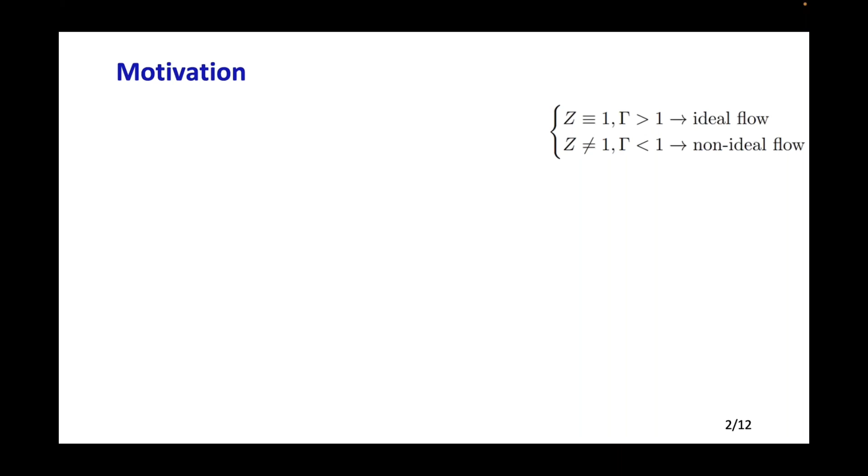So generally, the flow is thought to be ideal if the value of the compressibility factor Z is always equal to 1, or the fundamental derivative of gas dynamics Gamma is larger than 1. Otherwise, the flow is non-ideal.

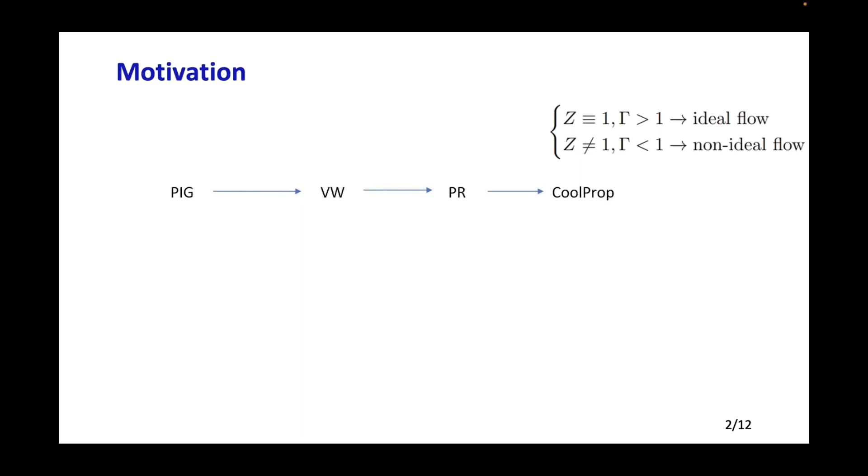In SU2, we already have the polytropic ideal gas model for ideal flow and the van der Waals model and Peng-Robinson model for non-ideal flow. However, if the flow is highly non-ideal, then a more accurate fluid model is required. An example is the fluid model provided by the CoolProp library. So hopefully, with a more accurate fluid model, we should obtain more accurate results.

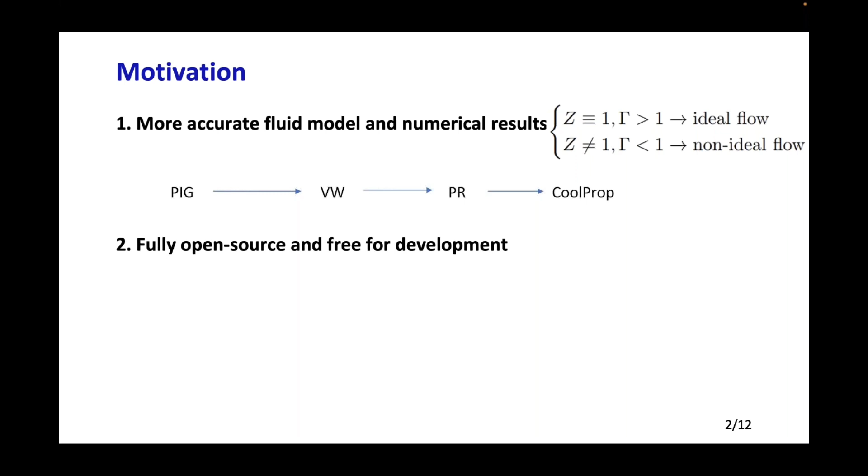So the second motivation is that we hope to obtain a fully open source framework. Although there are some other thermophysics libraries like REFPROP and FluidProp, they are commercial, so their use is limited. Luckily, CoolProp is fully open source, so it's free for development.

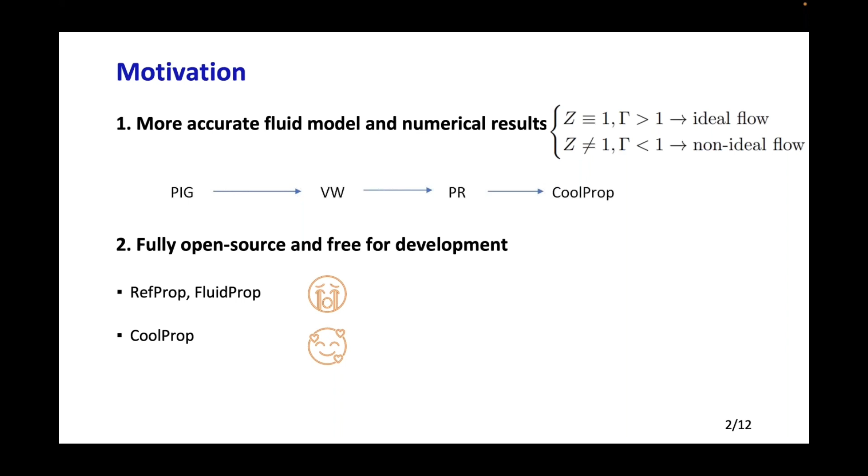Okay, so the goal of this work is to couple SU2 and CoolProp in order to extend SU2's capacity for solving non-ideal flows. Here, I just give a brief introduction of what CoolProp is. Actually, CoolProp is an open source thermophysics library, which is written in C++, but there are some wrappers for Python, MATLAB, Excel, and so on.

And it can provide the state-of-the-art multi-parameter equations of state and high accuracy transport properties, including the viscosity and conductivity. There are more than 100 fluids in this library, including popular fluids like oxygen, nitrogen, or carbon dioxide, so it should satisfy daily use. Also, it implements an efficient tabular interpolation to accelerate the computation or reduce the computational cost.

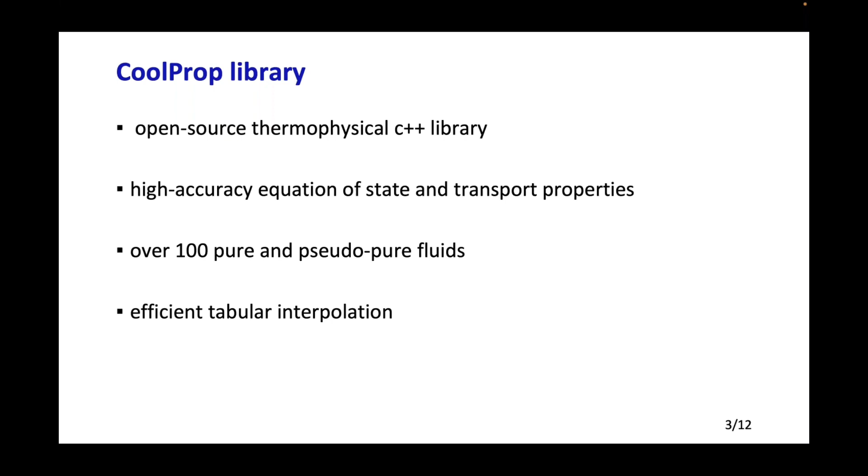Next, I will show the code architecture, but I mainly focus on the interface between SU2 and CoolProp. The interface consists of 3 classes: CoolProp, CoolProp viscosity, and CoolProp conductivity. Here, I just show one of them as an example. So if we see this flowchart,

CoolProp obtains the thermodynamic data like the pressure and temperature from SU2, and then it will call the CoolProp library to update them. After that, the new thermodynamic data, pressure, temperature, density, energy, entropy, even the heat capacity, will be transmitted to SU2 for other computation. And similarly, these two classes update viscosity and conductivity by calling CoolProp.

And this is an example of the config file. So to use this new framework, we just choose the fluid model as CoolProp. And here, we just type the name of the fluid, for example, nitrogen, oxygen, or carbon dioxide, as we want.

After that, CoolProp will provide some useful thermodynamic information, for example, the gas constant, the critical pressure, and temperature, so we don't need to input them manually. And similarly, we just choose the viscosity and conductivity model as CoolProp. So the use of the new framework will be very easy.

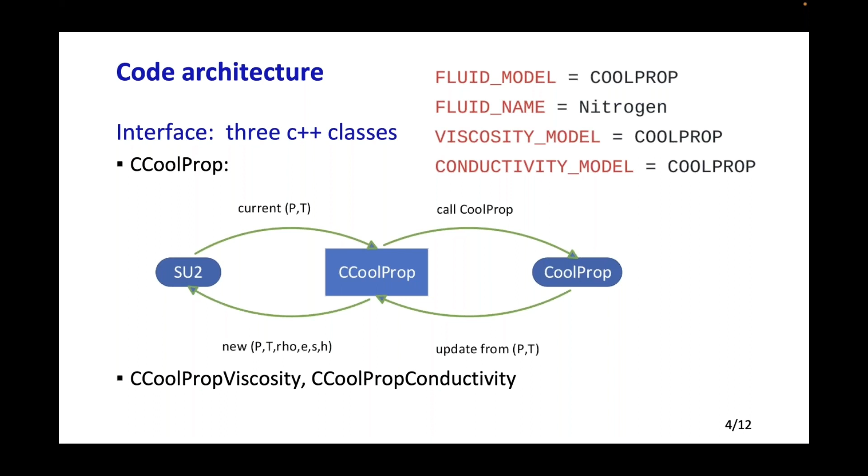Next, to verify this new framework, we consider 3 test cases. The first one is something like the SU2 tutorial, non-ideal compressible flows in a supersonic nozzle. And this is the geometry of the nozzle. Actually, we consider 2 subcases, as you can see in this table. The name of the first case is dilute. Actually, it's the ideal flow of nitrogen.

As you can see, the value of Z is around 1 and Gamma is larger than 1. The name of the second case is dense, which represents the non-ideal flow of MDM. If you see the value of Z, it's around 0.65, which means the flow is moderately non-ideal, because later on we will consider highly non-ideal flow.

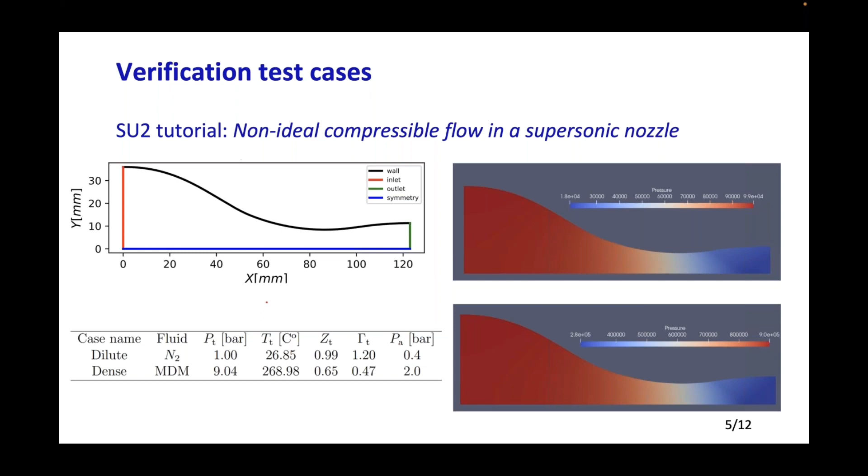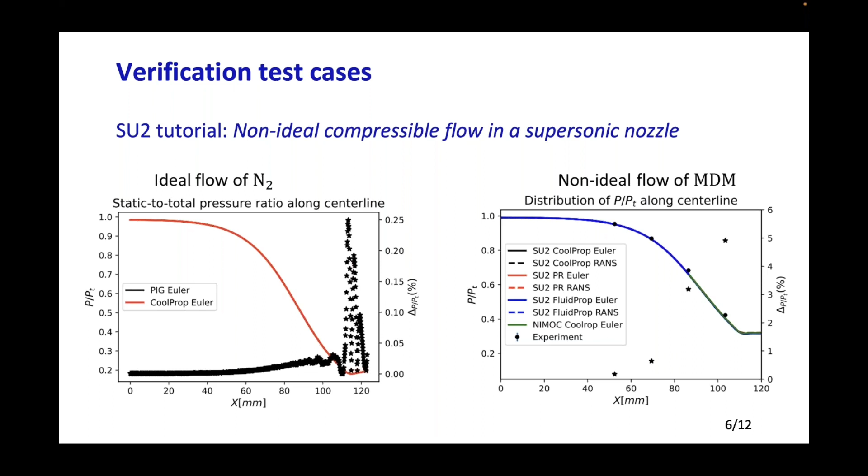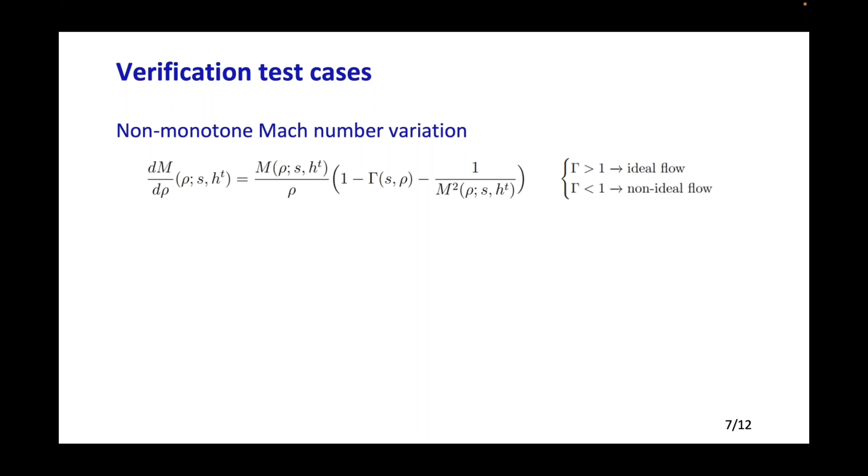The second case is non-monotone Mach number variation. So for a steady inviscid flow, the variation of the Mach number with respect to the density can be written as the following. Recall that if the flow is ideal, then the capital Gamma is always larger than 1, so this term should be negative everywhere. However, for non-ideal flow, Gamma less than 1 is possible, so this term, dM over dρ, may be positive in some region.

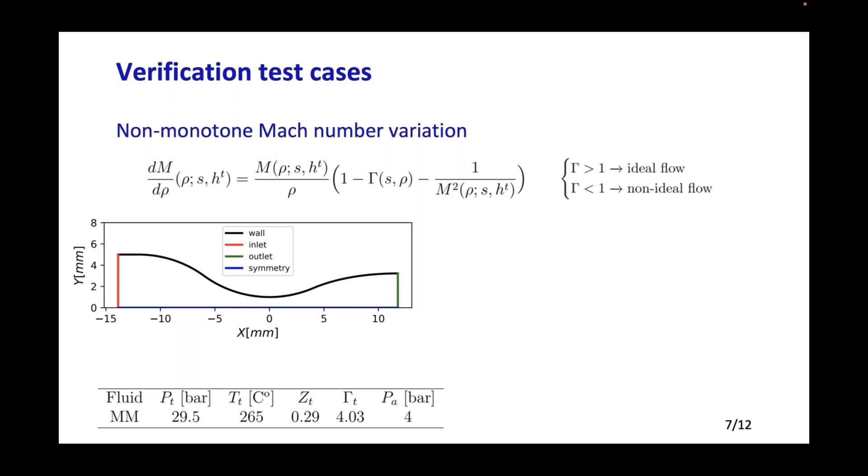In the figure at right, we plot the variation of Mach number over density along the center line. As you can see, the value is negative everywhere except in this small region in the subplot. And it's related to the decrease of Mach number in this small region. That's funny.

Again, we can say that the maximum difference between the results using CoolProp and Peng-Robinson is larger than 10%, and we can't ignore this difference. So the second test case shows the necessity of using the CoolProp library in the highly non-ideal flow field.

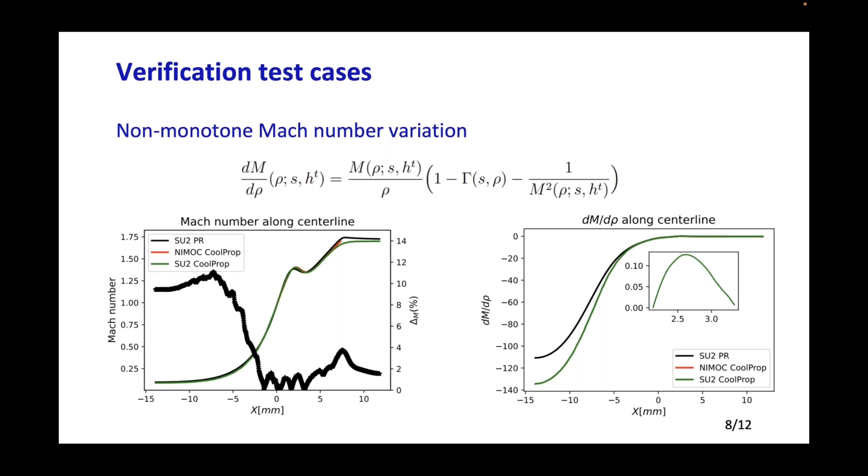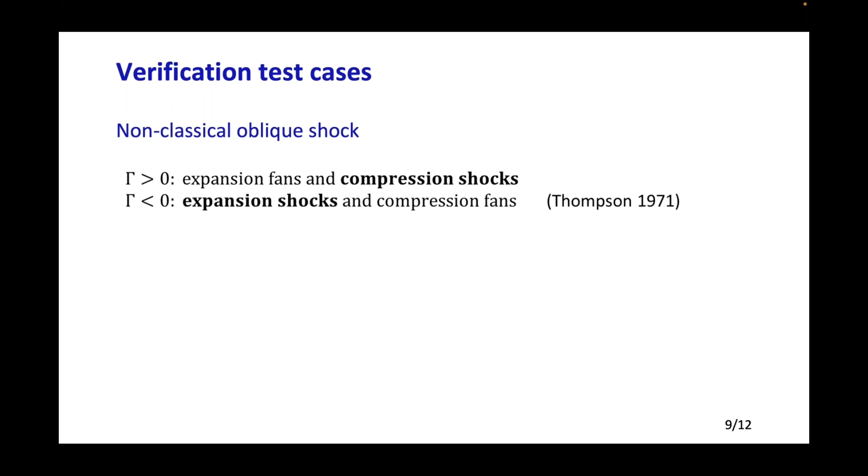And the last test case is the non-classical oblique shock. I think most of us are familiar with the expansion fan and compression shocks. However, in 1971, as Thompson pointed out, if gamma is less than 0, it's possible to observe expansion shocks. So to capture the expansion shock, we consider this geometry. Actually, it's a supersonic flow over a wedge.

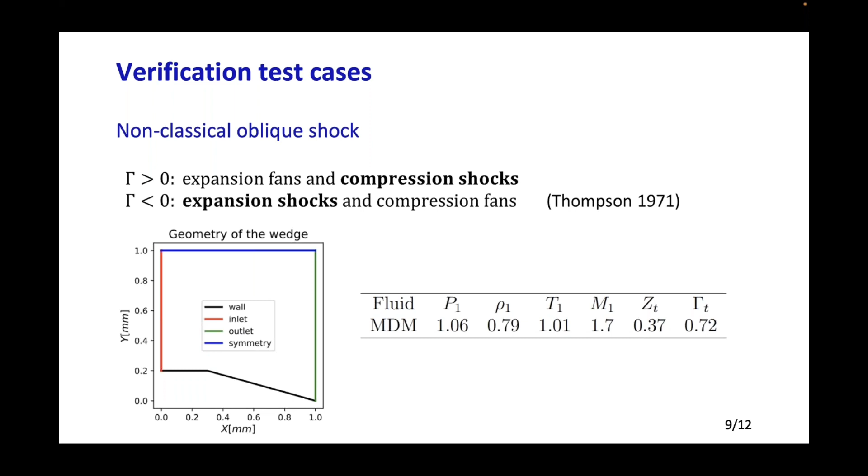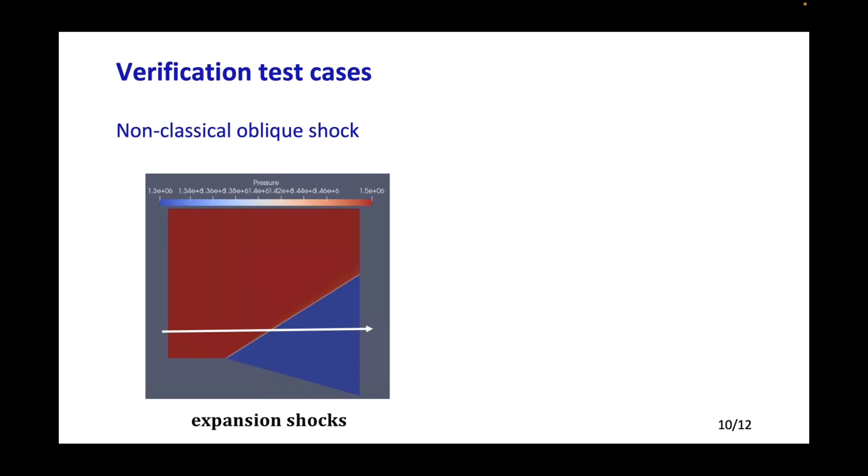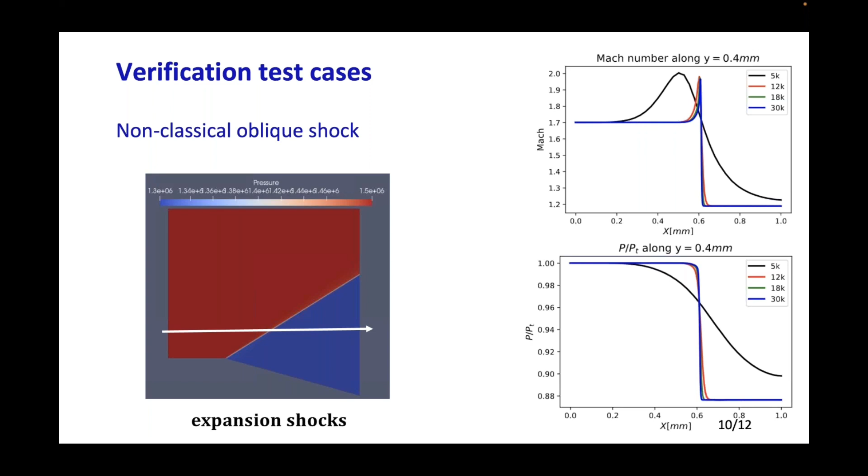Let's say the fluid in this case is MDM, and both the value of Z and gamma are less than 1. So this is the contour of the pressure, and the existence of the shock is very clear. Now, if we plot the Mach number and pressure across the shock, in these two figures at right, the blue line is the grid convergence solution, and we can find both the Mach number and the pressure decrease across the expansion shock.

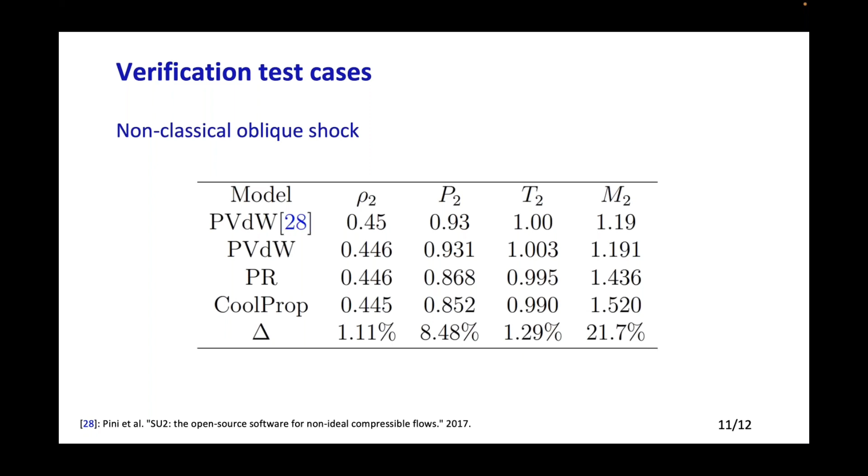Some final remarks. The new framework SU2-COOL is developed by coupling SU2 and CoolProp, and the data exchange between them is achieved by 3 classes. The new framework is verified. And finally, the function of the new framework is to extend SU2 capacity for solving non-ideal compressible flows, especially in the highly non-ideal flow field. That's all. Thank you.

Thanks, Peng, for the talk. So I think we're going to take questions. Go ahead. Thank you very much. You're welcome.

My only question is, what is the computational overhead in terms of cost? So you mean the additional computational cost? Okay. Actually, we assessed the computational time for the 3 test cases. Approximately, the computation is around 20 to 30% slower if we use the CoolProp library compared with the embedded models. Slower, but we have no choice, because we need to call the CoolProp library at each iteration step. So to obtain more accurate numerical results, we need more computational cost.